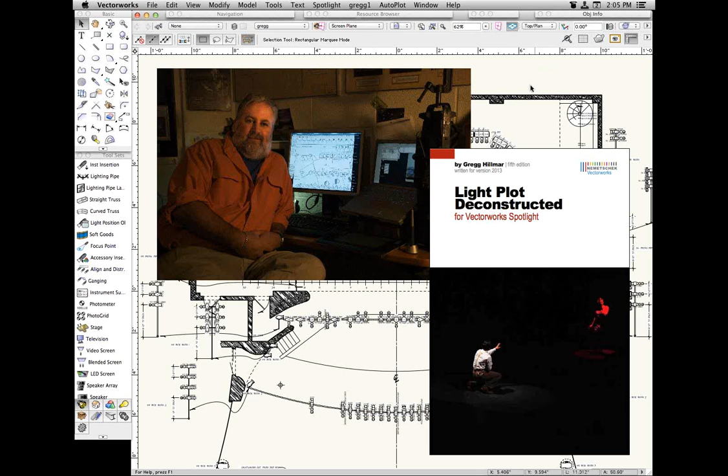Vectorworks 2014 just came out, about 10 days ago or so. And of course, there will be a 6th edition of Light Plot Deconstructed upcoming here very soon. So having said all that, let's dive right in.

One of the things I want to stress is that what we're headed towards is in fact the light plot. The plot is the final output that we're looking to do here. A light plot, of course, is a method of communication between the designer and primarily the master electrician, but also any others on the production team. So it is a very specific kind of drafting to make that happen.

As such, it is primarily a two-dimensional drawing. And while Vectorworks certainly deals with three-dimensional space, and we'll talk a little bit about how that works in using some of the tools, it is important to recognize that at the end of the day, it will in fact be the two-dimensional drawing as seen here.

The other thing I'm going to mention today, to start with, is we're not going to spend a lot of time today talking about basic Vectorworks stuff. I will point out workspaces and so forth, including menus. You might notice I've got my own menu and different menus, and have rearranged some of the menus across the top here. Your workspace, including menus, toolbars, and tool palettes, is completely customizable and can be arranged any way that you want.

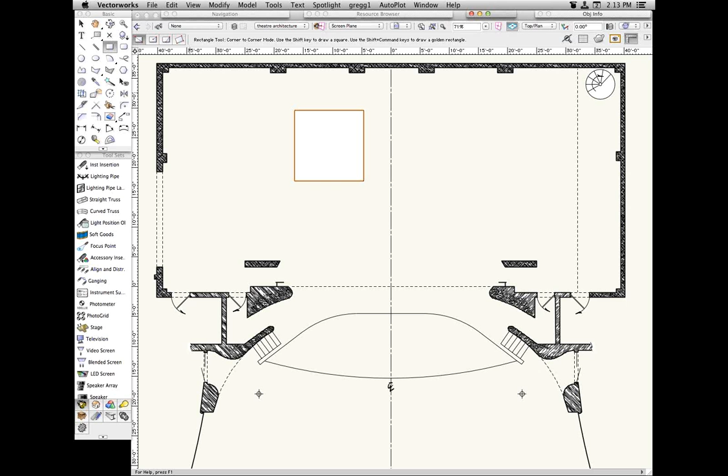Classes work across all layers. So if you make a particular class invisible, every object that's in that class will be invisible across all layers. So those give us very nice control of a lot of the graphic attributes.

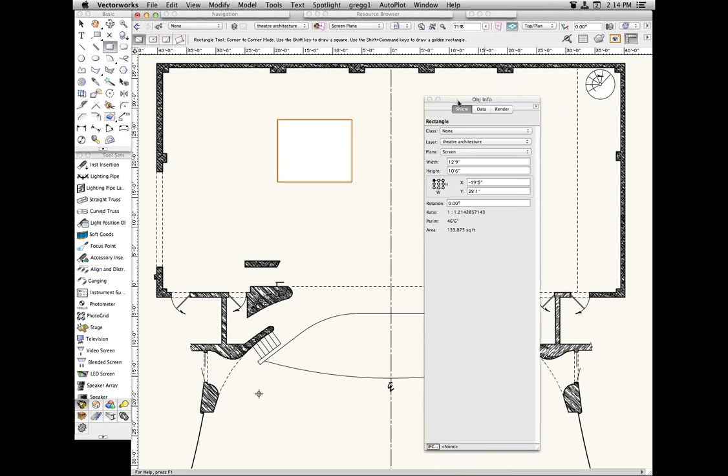And it's worth mentioning one of the neat new features in Vectorworks 2014 is that now from the object information palette we can create new classes and/or new layers straight from the palette, which will make working with classes and layers a whole lot easier and better.

All right, so let's get rid of this rectangle and look at our theater here again. This is a two-dimensional representation. This actually came in as a DWG, as I recall. It was sent to me by the production manager and was basically copied and pasted into a Vectorworks document. Vectorworks can easily import DWG and DXF files without any issue at all.

There are a bunch of parameters that do need to be set and dealt with, since there are differing ways that folks using DWGs work. But the import feature is very robust and has been improved also in 2014.

New in 2014, rather than importing information like the floor plan of the theater, there is now an option to reference a DWG or DXF file, which, like referencing a Vectorworks document, will bring the graphic information into the document that we're working on, but not bring in all of the classes and that sort of thing that you may or may not want in your document.

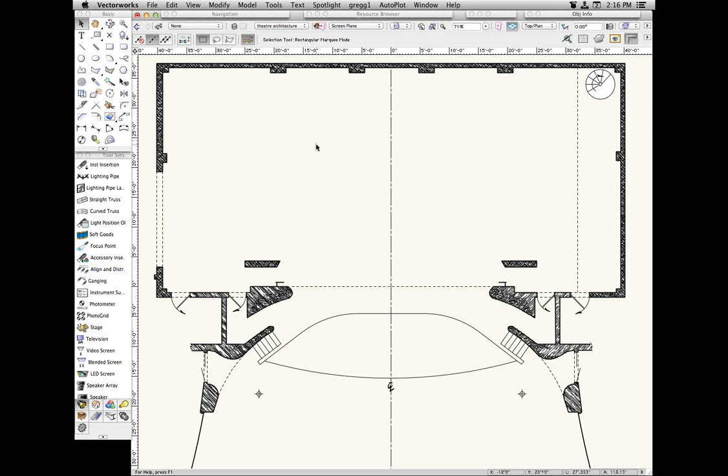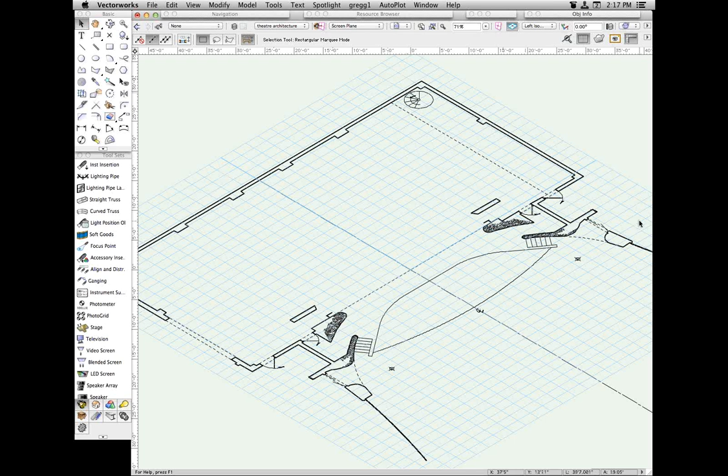So, for example, if we go to a three-dimensional view of this space, we're now looking at this in the left isometric. All of these are layer plane objects, so they look as if they're laying down on the floor, which, if I put my grid back in here, you can see. Having these be layer plane objects as opposed to stuck to the screen allows us to see the space in 3 dimensions and to start to interact with the space also in 3 dimensions.

And if we need to and want to, we can actually very easily change these from a 2-dimensional object into 3-dimensional situations. So if I grab the push-pull tool, for example, click on this and pull this up, I'm going to tab into my HUD, tell it that this is 18 feet tall, and we've just created that 3-dimensional object there. I can grab this, say make that the same height as this, grab this over here, there we go, and make that the same height. So we can very quickly turn this from a 2-dimensional drawing into a 3-dimensional drawing very easily.

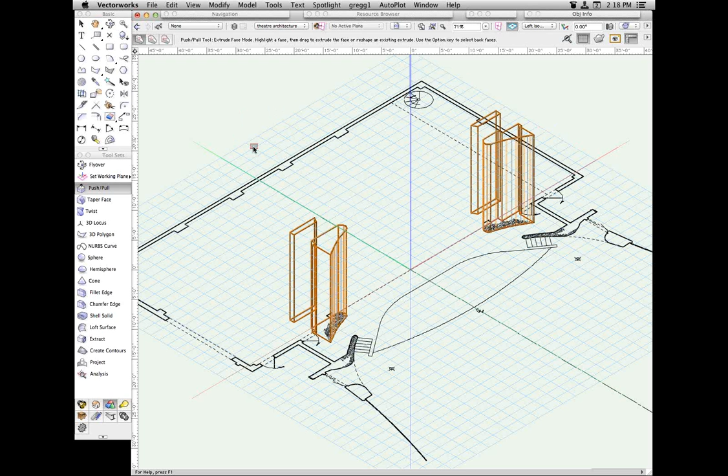Which will become very useful to us later on. And I'm just going to undo all those operations so we go back to where we were. Let's do this again. One of the problems that happens is this is now a 3-dimensional object. If we go back to our 2-dimensional view, you can see that the visual of that has changed and is not something that I would necessarily want in my 2-dimensional version of the plot.

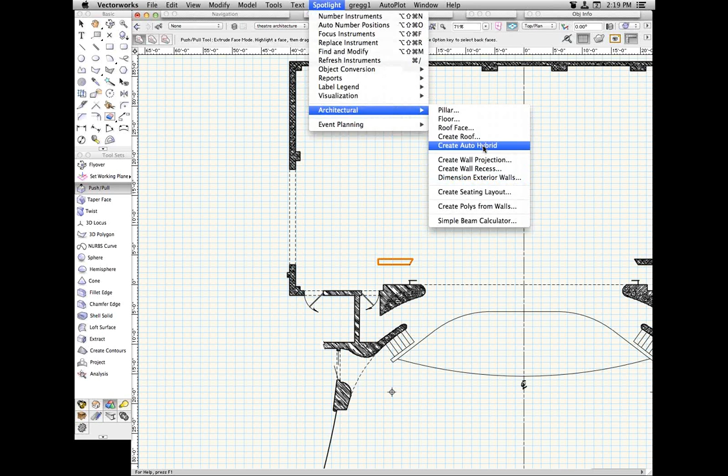One of the nice things that came in Vectorworks 2013 is the ability to change this into an auto hybrid object. If I go to the Spotlight menu, it's under Architectural, and create Auto Hybrid. This is still a 3-dimensional object, but if we go back to our 2-dimensional view here, it's now being displayed using the 2-dimensional graphic attributes and so forth, all of which can be controlled via the Object Info palette and changed to be as we like it.

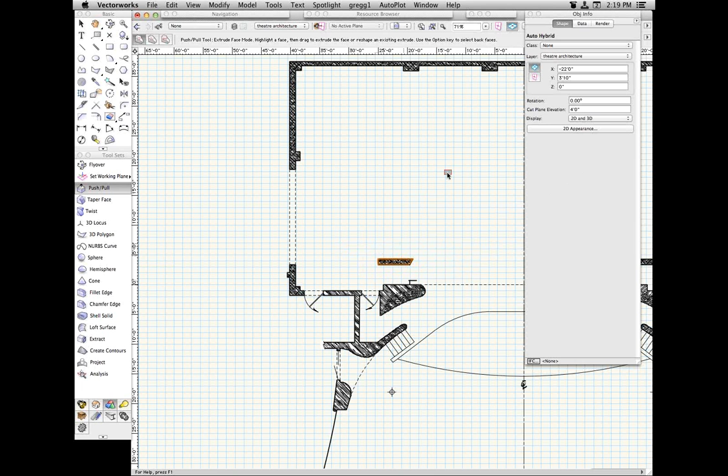So that too is a really nice change that I can see making a huge difference going forward in the way that information like this is dealt with and played with. So let's turn that back into our 2-dimensional object and go back to here. So now I've got the theater all set.

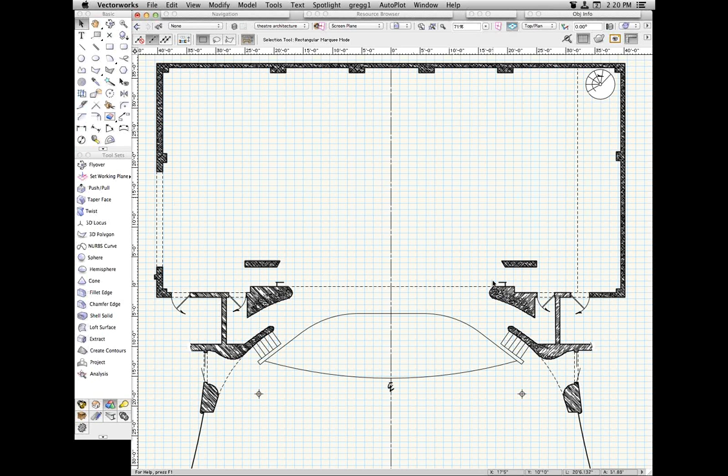The next thing I'm going to want to do is to import the scenery. And again, we have several ways that we can import information. We can import a PDF, depending on if that's the way that our scenic designer is sending us plans. With a PDF, snap cues and that sort of information still works. You can see my cursor here snapping and giving me information about things on there. That does work when you import a PDF.

With a PDF also, if it was created in the right way, we can explode a PDF and get down to the core geometry and use that, which will then allow us to create three-dimensional space out of that as well. We can import images. There was a scenic designer I worked with for quite some time that still drafts everything by hand. So when he sent stuff, I'd scan it or take a picture of it, turn it into a JPEG, and import that to use in the drawings as well.

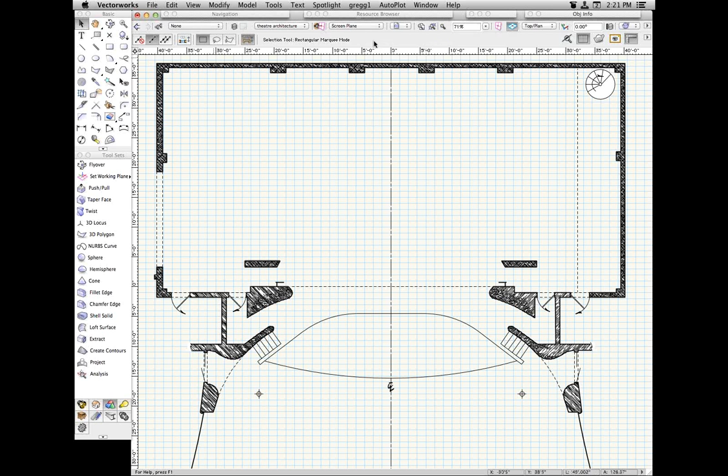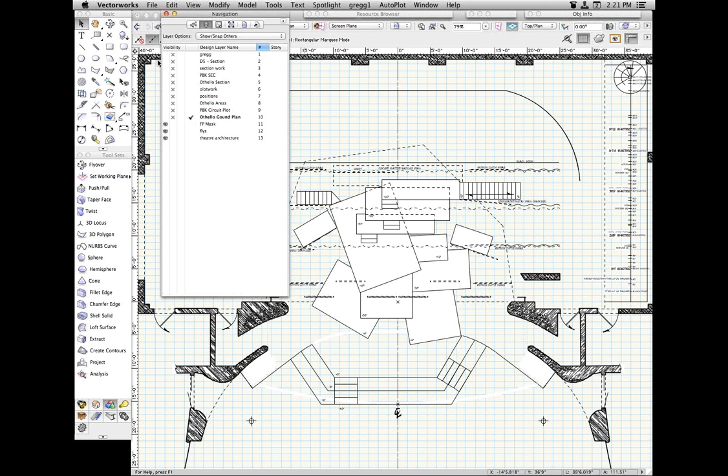So there are several ways that that can all come. Luckily, the designer I was working with on this particular project also used Vectorworks, so it was very easy for me to import his work. And what you just saw me do, I just used a saved view here to change to a different layer and class scheme. So right now, for example, the theater architecture sheet is on the drawing table. The flies sheet is on the drawing table. The floor plan mask sheet of vellum is there. And the Othello ground plan sheet is now back on the drawing board.

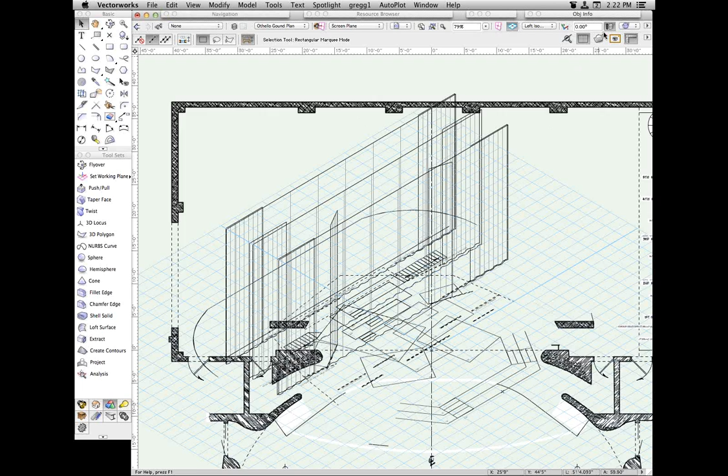Okay. And again, these are all two-dimensional operations, so we can see the two-dimensional nature of things here. Oh my goodness, why is my theater still in one direction and all of my scenery in the other? That is because unified view is turned off. If we turn unified view on, then layers will stay in the same relationship to each other as we're moving back and forth between the two-dimensional and three-dimensional situations. So lots of ways that we can import the scenery and get information about the theater and the scenery into our space. Okay. So now with the scenery here and the theater there, we're ready to start thinking about the lighting.

I generally start thinking about focus areas. So if this is all the playing space, then how am I going to light this space in terms of the action of the play and the scenery, using the physical characteristics of the lighting instruments and so forth. We can only light a certain chunk of space with each lighting instrument, and we usually define that as a focus area, where an instrument is actually focused to.

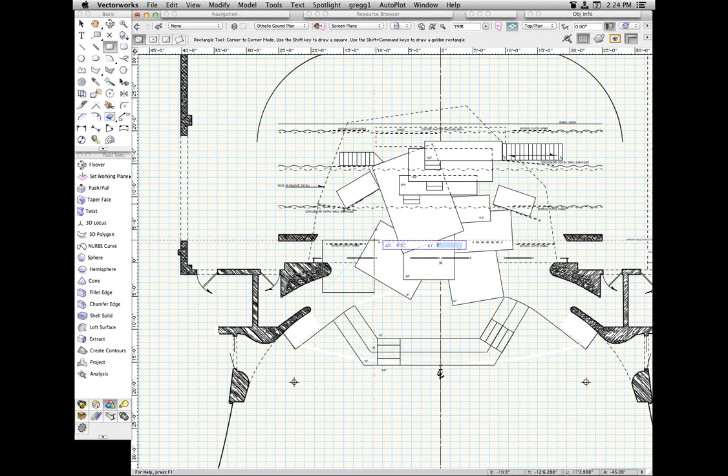So I'd be looking at, for example, the width of the proscenium and the width of the playing space here, trying to decide what size chunks of space I like. Generally speaking, I make them anywhere from 6 feet to 8 feet. So I might plan out, well, let's see, if I can draw an 8 foot by 8 foot space in here. Again, I'm just tabbing into my heads-up display there and specifying a particular size. I just made that an 8 foot by 8 foot rectangle. I could change that if I wanted to here in the object information palette.

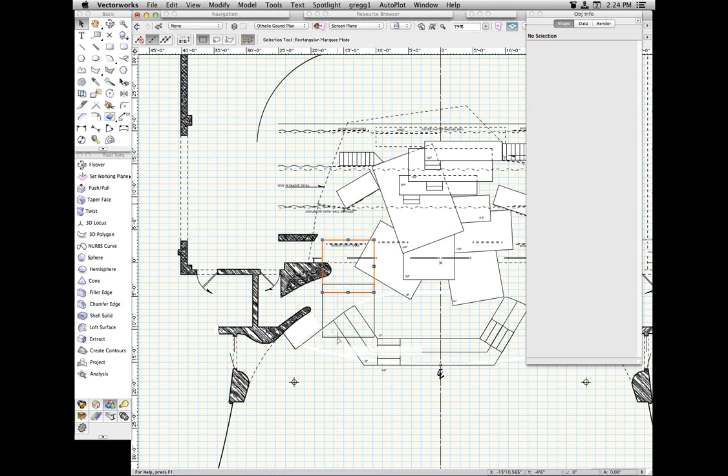In this case, I'm going to change its class to be a draft tech, and you can see what that does is change the graphic attributes of that particular rectangle, so it's a thin red line and no fill. So I might decide that 8 foot by 8 foot works well for this space and for what the director is doing, what the actors are doing, and fills the space nicely. I particularly like an odd number of focus areas, so that there's always an area at center stage, and they go to either side. And in this case, 8 fits very nicely within the architecture.

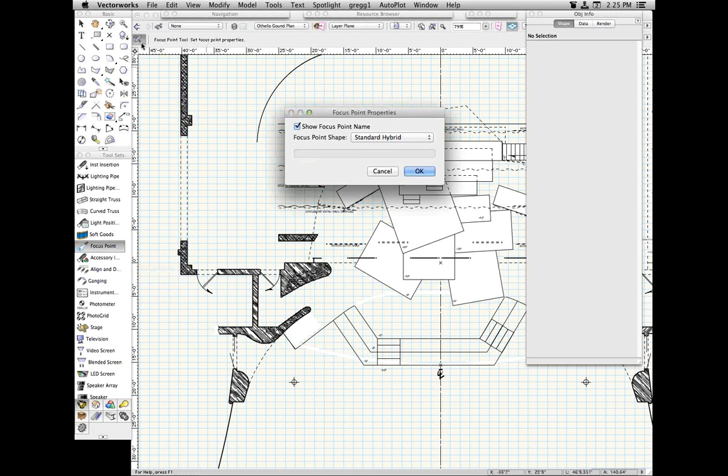So once I've decided that, I'm going to get rid of that rectangle, go to my Spotlight tool set, and choose the focus point tool. Then come up and use the focus point properties. And here I have a choice. I want to show the focus point name, and then I get to choose a focus point shape. You notice there are several choices here about sizes and shapes, including a custom one that I have done myself. So I have created a graphic. It's a three-dimensional graphic to represent a particular focus point that in this case is an 8-foot by 8-foot by 7-foot tall cube, if you will.

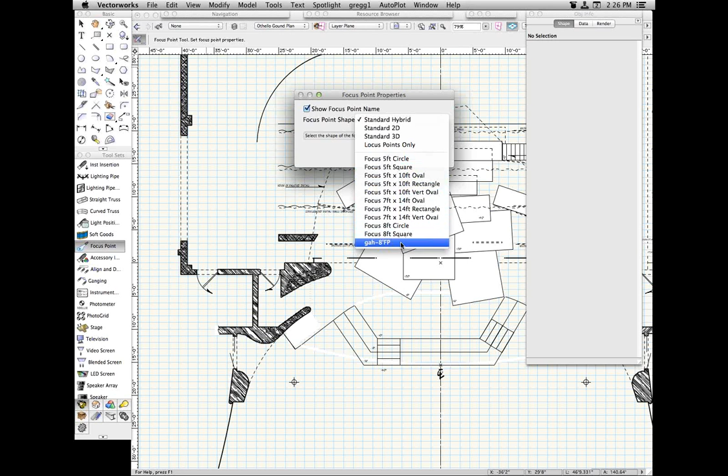Another space I work in quite often has a fixed height grid, and because of the fixed height, my areas are usually 6'6", maybe cheat out to 7 feet in some cases. So in that space, I've got another custom one that's a 7-foot by 7-foot by 7-foot square. So you can customize the graphics that you use for your focus points. I'm going to choose mine here, tell that OK, and then place one down here in this corner for right now. It's going to ask me for the name. I'm going to call this area AA, and I'm using double A's because, well, you'll see why shortly.

It's asking me for a focus height, and this is rather important. Vectorworks works in three-dimensional space, even though what we're looking at now and what we will end up with at the end of the day will be a two-dimensional representation. It still is working in three-dimensional space. So this is the first time we're starting to set that up in terms of lighting instruments, and it's saying, okay, where do you want to focus this particular light? And 5 foot might be a perfectly fine focus height, roughly shoulder height, for a normal actor standing on the stage floor.

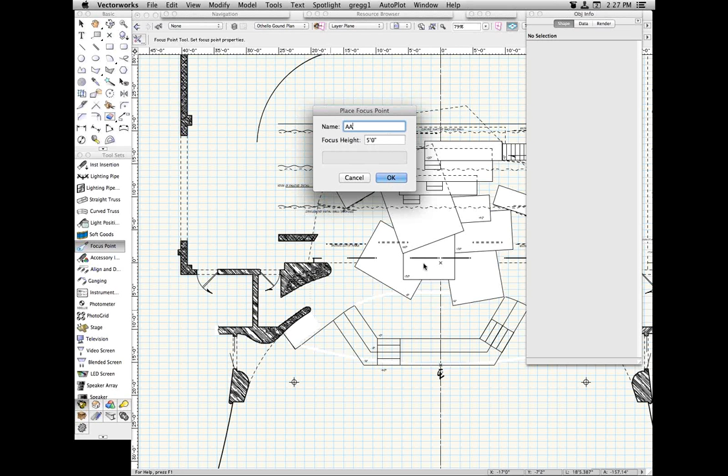So in this case, if I'm lighting the area on the stage floor here, I might leave that at 5 feet. However, if an actor came up on one of these platforms that's a little higher, lighting at 5 foot would probably be a little low for an actor there. So in that case, I would change the focus height to be a little higher. But for this one, I'm going to leave that, tell that OK. And it has now placed the focus area down here in the corner where I clicked. Okay, and it is. Let's zoom in on this a little bit here.

We can actually now see that this has got the focus area here. It's named AA, and actually all of this is changeable. We can change the font, change the size of the font, etc., so that we can customize this graphic to look like anything that we want it to look like. We do not have to accept the program defaults for that space, and it will continue to work exactly the same. So it is now set there, ready to go.

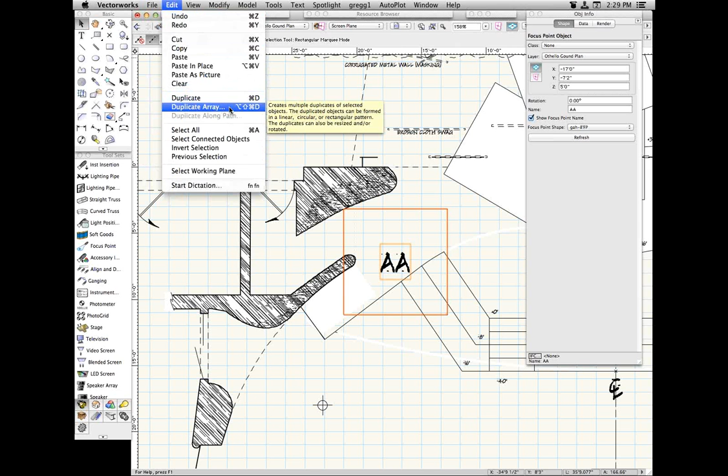I then would move on to the next focus space. If I was doing something like a dance concert where everything was on the floor, I could use the duplicate array tool here to populate the entire space quickly with focus areas. Or in a situation like this one, I would probably do them more or less one at a time, depending on the height of the platforms and those sort of things.

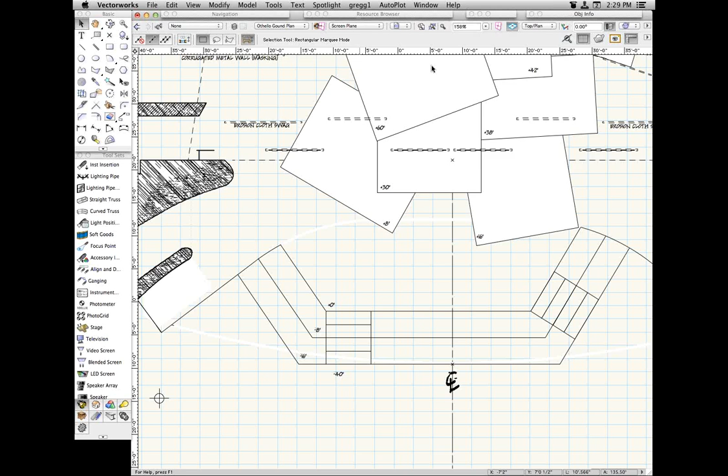However, I'm going to delete that because through the magic again of a saved view, we're going to just stick the sheet of vellum that I had already done all of the focus areas on right back into the document here, and you can see the placement of focus areas for the particular space that we're going to use to light this. So now we've got the focus areas.

The next thing I'm going to think about is lighting each of those. In order to do that, we're going to need to be able to hang lights somewhere. So the next thing I want to do is create positions to hang those lights. Vectorworks 2014 has introduced 2 new tools, a lighting pipe tool and a lighting pipe ladder tool, that make what used to be a rather convoluted process to create positions very easy.

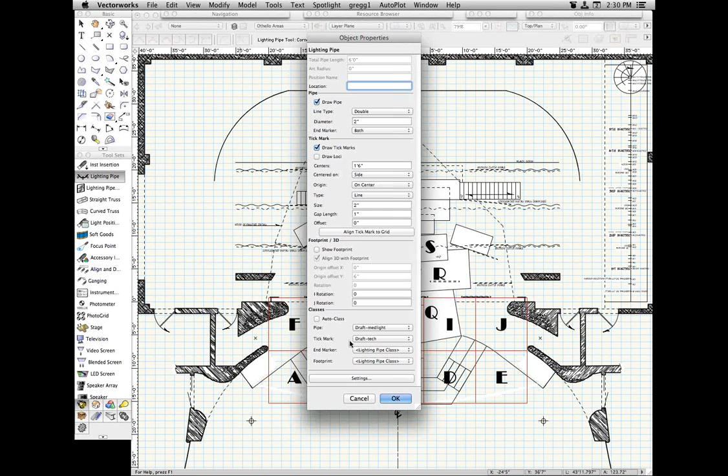So if I select the lighting pipe tool, for example, I can come up and set some properties. These have already been populated with things that I've chosen before, including my class designations. So my pipes are going to be drawn with a medium lightweight line. Tick marks, which we'll look at in just a second, are drawn with draft-tech, which is the light red line. Lots of options here. I'm just going to tell that OK.

One of the real benefits of the lighting pipe tool is that we can now draw a position easily, including doing curves. In previous versions of Vectorworks, doing a curved position was very convoluted. It could be done, but it was just not an easy sort of thing. With this new tool, you can use any of the normal drawing methods to draw what a position really looks like.

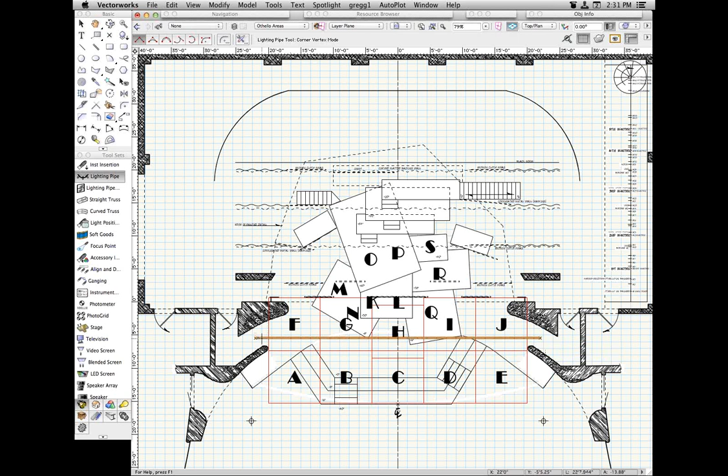The one I'm going to draw, I'm just going to use the straight tool here, and I'm going to draw this line. You might notice I'm cheating. I'm snapping to a couple of points that I had previously placed in the drawing. Double-click there to create that. If we look at our object info palette now, we can see that this is a lighting pipe. Class and layer are listed there. X, Y, and Z are listed there, and all the stuff that we had chosen before is also listed.

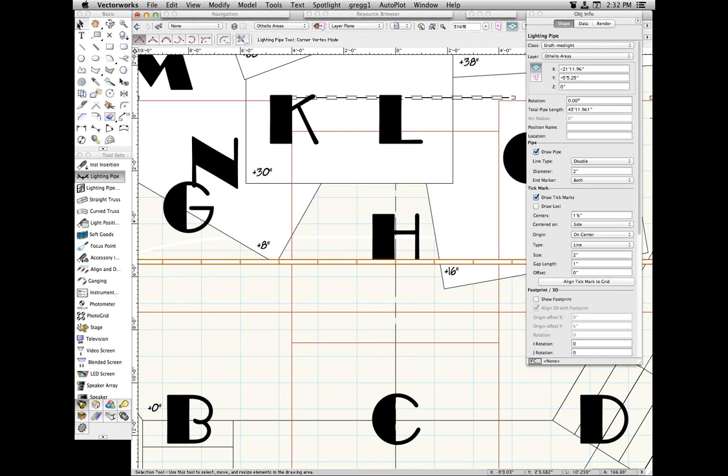It's being drawn with the medium weight line, and if we zoom into this, you can see that the way I've done this, there's a tick mark every 18 inches. You can see it lining up with the grid. If I turn the grid off, you might see that better. So on the pipe, there is now a tick mark at a user-definable space. I leave mine set at 18 inches, which is sort of the industry standard distance apart for most lighting equipment.

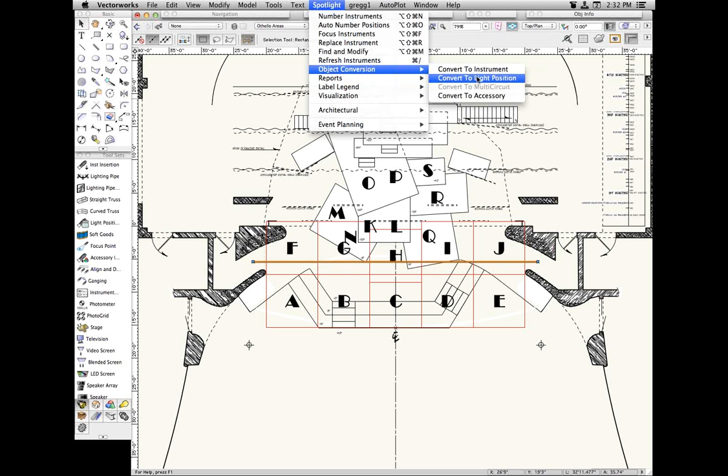So this is now a lighting pipe. It is not quite a position yet. We still need to turn it into a position. Object conversion, convert to light position, and it now is first front of house position. Tell that OK. It helps if it's selected, thank you very much.

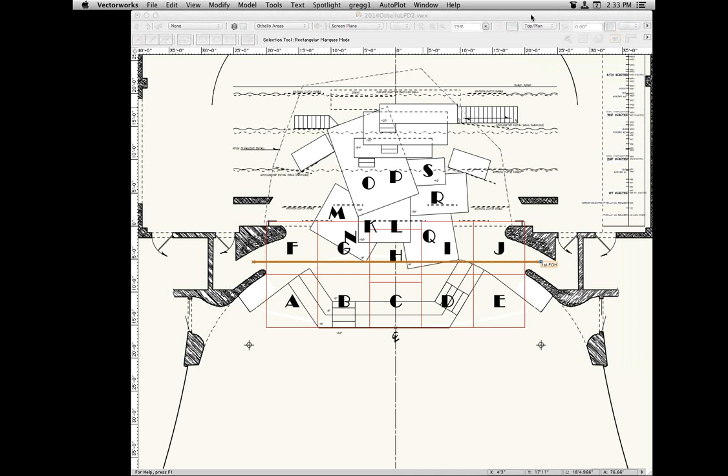Again, it is now a light position object. X and Y position is there. Its Z height is 0, which means it's sitting on the floor. Not really a good situation for a lighting position. So to find that Z height, what I might do is pop into my section drawing. Again, I'm using a saved view here to pop into my section drawing.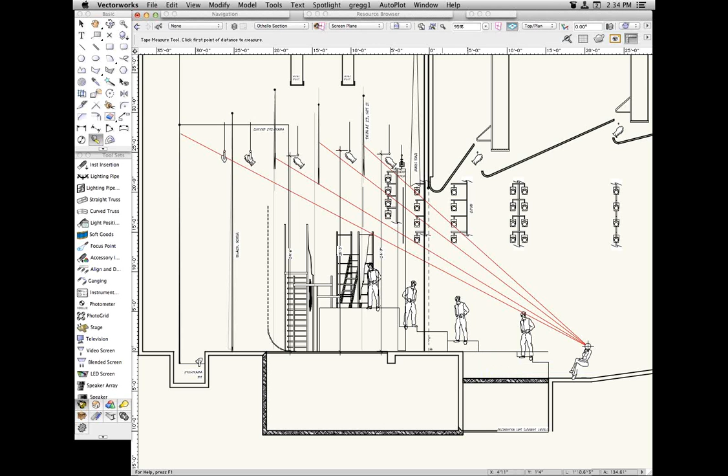First front of house position is here. I might grab my tape measure and click right there, come down to floor level, and I can see that that's basically 25 feet in the air. Escape out of that, go back to my previous view, and in my object information palette, I'm going to tell that to be 25 feet in the air. Okay, position name is listed.

One of the great things in Vectorworks 2014 is that position summaries and instrument summaries have been completely rewritten. In previous versions, the position summary was basically a useless piece of information. You could do some things there, but had no control over what it looked like or how pieces were ordered. Now in this version, you can have a whole lot of control over what it looks like.

You can also create this, and it's all handled through the instrument tool over here, which we will demonstrate in a little while. It's a remarkable improvement over what used to be here.

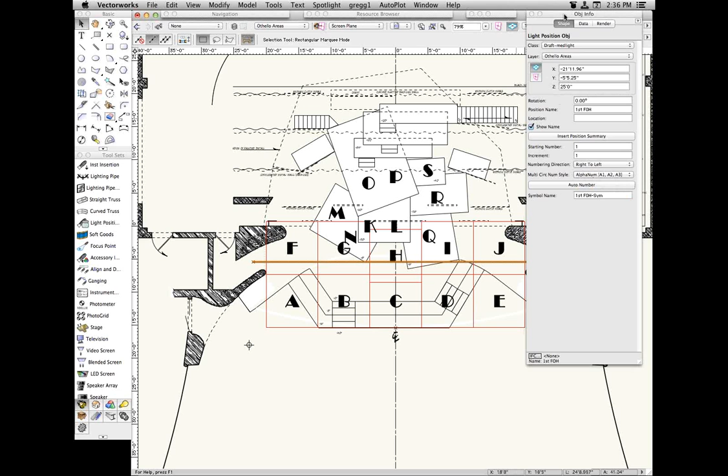We can still decide how we want light position objects numbered, whether instruments start at number 1 and increment from there, whether numbering goes right to left, left to right, top to bottom, or bottom to top - industry standard in this case. We're going to number right to left on this particular thing. We can also decide how multi-circuit instruments are numbered, whether cyc lights, for example, are numbered as A1, A2, A3 for 3 cells, or 1.1, 1.2, 1.3, or 1A, 1B, 1C. We can choose this on a per-position basis. So some nice new things with the light position object.

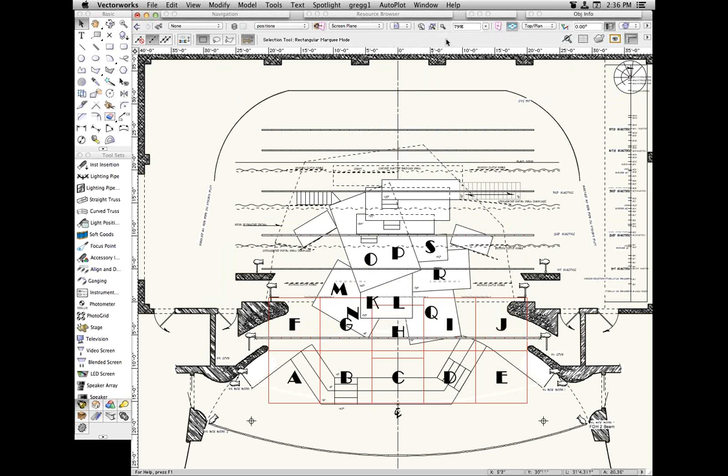We'll come back and look at that more as we go through. I'm going to delete this because, once again, through the magic of a saved view, we'll slide the position sheet of vellum back in there, where I've already created all of it, including, you might notice, some curved lighting positions out here in the front of house position.

So now we've got our areas that we're going to light. We've got our lighting positions, whether they're based on architecture or added on a per-show basis - whatever we can add in - and we're now ready to start thinking about adding some lights.

If we were, for example, lighting area C right here, dead center, I would start by figuring out where the light's going to come from for this particular angle. I would work this out ahead of time. For right now, I'm just going to grab the line tool and pull a line, and with a nod to Stanley McCandless, we'll say the front light coming in from this side is going to come in at a 45-degree angle.

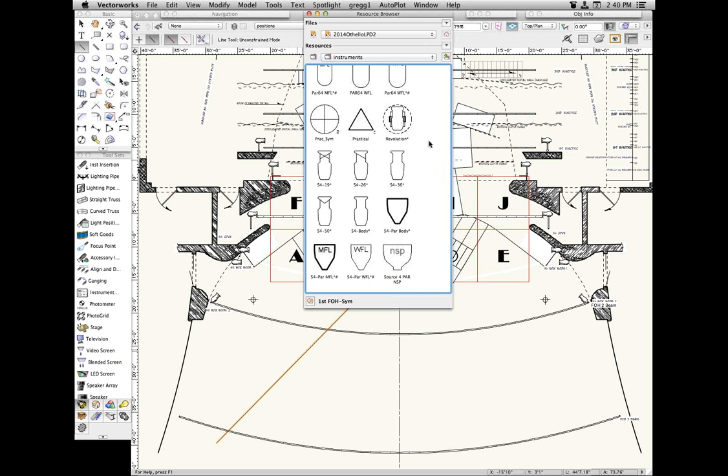One thing we should say about these symbols is that they're not just the two-dimensional representation - the symbols include lots of information built in. So it's not only the graphic representation, but also things like the beam angle and field angle of each instrument, candle power, the lamp that's in the instrument, the weight, color frame size, and all sorts of information provided by the manufacturer that's actually part of each of these symbols. Very nice to have.

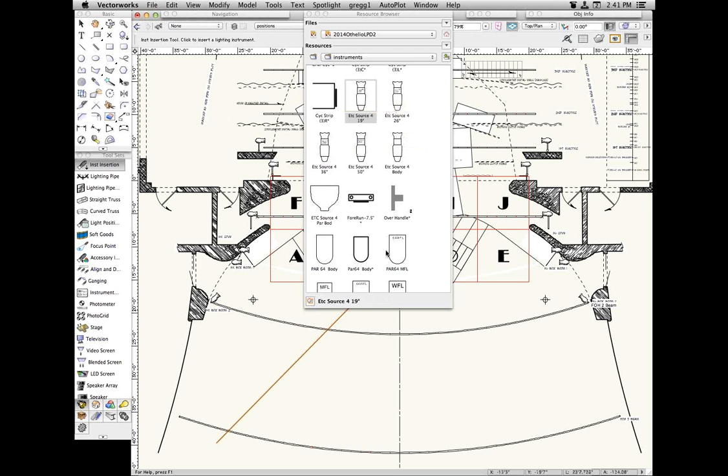Looking at this, I'm going to double click to make the ETC Source 4 19 degree my active symbol. I can see it's the active symbol because it's listed at the bottom of the resource browser. You may have noticed that when I did that, it automatically selected the instrument insertion tool from the toolset over here.

Let's zoom in right here on this second front of house position. I'm seeing my little tick marks, which give me my 18-inch spacing. So if I click right on that second front of house position, I'm going to start to place a lighting instrument, and you notice it has just started to place it.

I can rotate this instrument around and determine where it's going to point. There are two schools of thought here. The first says that when you're drawing a light plot, the instrument wants to point at the area you are focusing it in, so in that case I might want to point my instrument at area C. The second school of thought says that all instruments should be drawn at the 90-degree marks, the cardinal positions, either straight up and down or completely to the side. I was always taught to draw at 90 degrees, so I'm going to make that choice.

The second click then places the instrument into the drawing. If we look at our object information palette, we can see this is a lighting device. Its class and layer is listed there. Notice the X and Y position, notice the Z height, and notice that it's picked up the fact that it's on the second front of house.

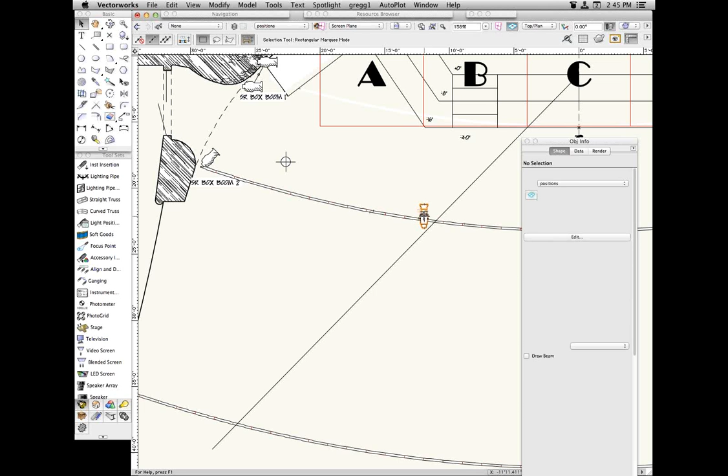Now, if we come back to our lighting instrument and double click on it, we're going to get a dialog box that has a lot of the same information. It tells us the position, the channel, the dimmer we've added in, circuit number. The nice thing about this is that for the focus, it has a drop down that will allow us to select the current focus points we've already added into the document.

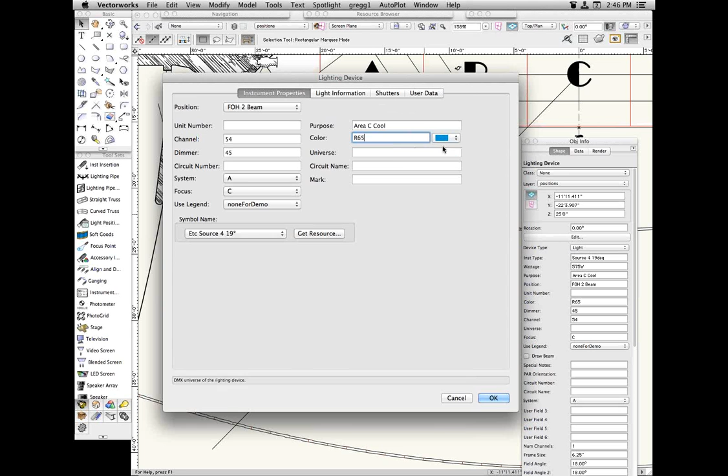And you might notice that as we add R65, it picks a suitable close color, takes the RGB value and translates it into what it can do on a computer so that the swatch actually matches the 65. Now there's a lot of other information in this dialog box that follows the same information that's here. We can also, as we get further into this, set shutter cuts that will be visible on the document.

For right now, let's pull that back out. We can also specify particular user data, adding or changing specific fields to enter in any data we particularly want to add. So all of that is just another way, and sometimes a better way, to get to the same information as the object info palette.

The point is, with the focus here especially, we want to make sure that this light is related to this focus unit or focus area, so that they know that will allow them to now share some data there as well. So what that does allow also is for us to be able to see some additional information.

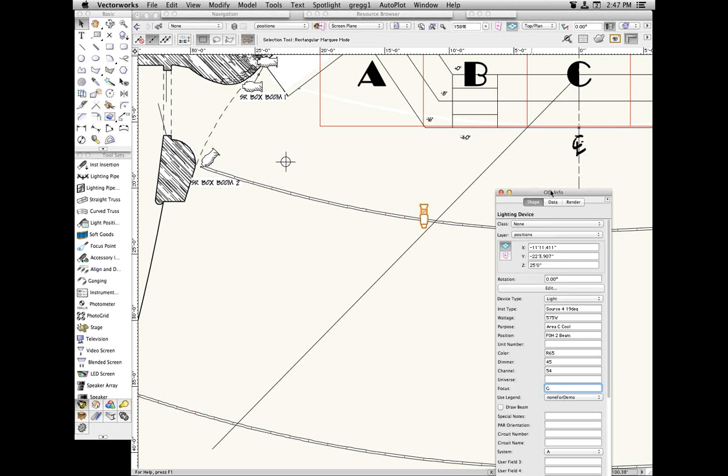I'm going to move this over here for the moment so we can slide this down a bit, and I think we're done with this line for the moment, so let's make that go away. So with this light focused at area C, and we've told it so, I can say, okay, let's see what that looks like.

What it has done is said, okay, so I'm a Source Four 19 degree with these field angles and these beam angles, which is the information that comes with the instrument, and I'm 25 feet in the air at a 45-degree angle. So what's the optics that will happen on the stage? This then gives us a representation of the beam in the field from that light at this particular place, which is a very nice graphical representation of what we're actually seeing.

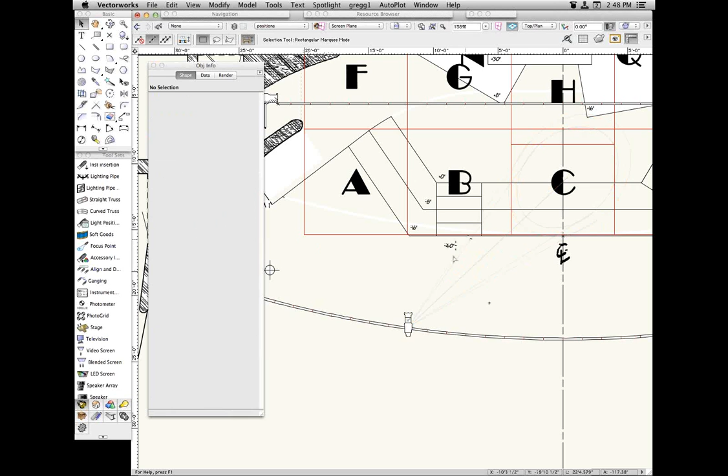Now, I unselected it so you could see that one of the things it does here too is it projects the color of the gel we've added into the instrument. So if we change the color here, then it updates the color here as well.

And in fact, if we wanted to, we could have that drawn - let's go back to R65 because that's much more interesting - as a 3D solid, which shows us a little bit more graphically what we're actually covering.

Right now we're looking at the beam at the focus point. We could say, okay, what does that look like also at the fall-off point, i.e., in this case, that's set to be 5 feet further down the line from our focus point - where is that hitting on the floor, basically. So a lot of information we can see there, because these three objects are talking to each other and sharing information.

One of the things I see, for example, if I'm lighting area C, this particular light is not covering that entire area. So I might want to make a decision about that. That's not quite the right light for this particular case.

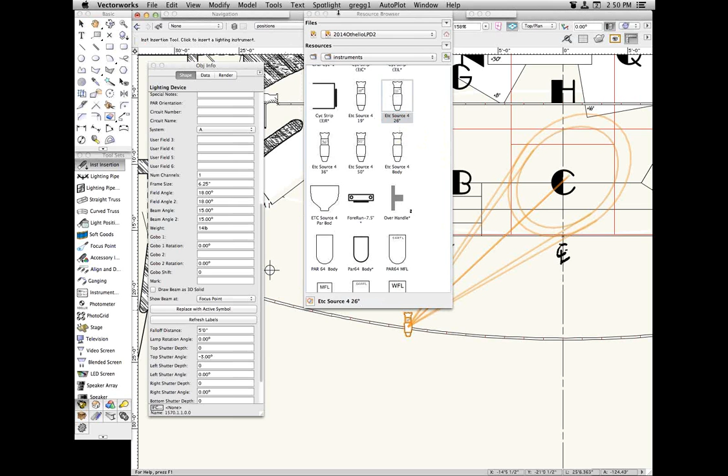So I might go back to my resource browser and grab, say, the 26 degree, double click to make it the active symbol, and choose to replace with active symbol from the object information palette - it changes this to a 26 degree. All of the information about the 26 degree is shared. You can see the beam angle and the field angle have changed, but none of the information that I added in has changed.

So it has brought all of that information with it, made that change, and I can then say, well, is this then a better choice for that throw than the 19? So the idea that we're actually seeing this information really does help us in terms of making decisions about the light as well.

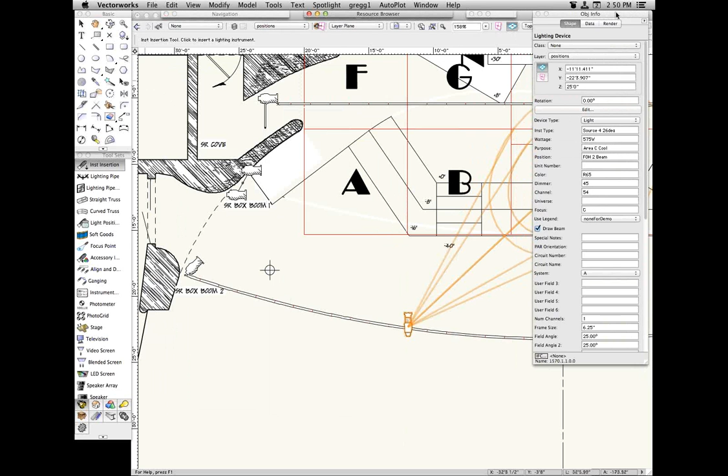One of the new things in Vectorworks 2014 is that we can now not only see the beam in the horizontal state here, but also we can choose to see it vertically as well.

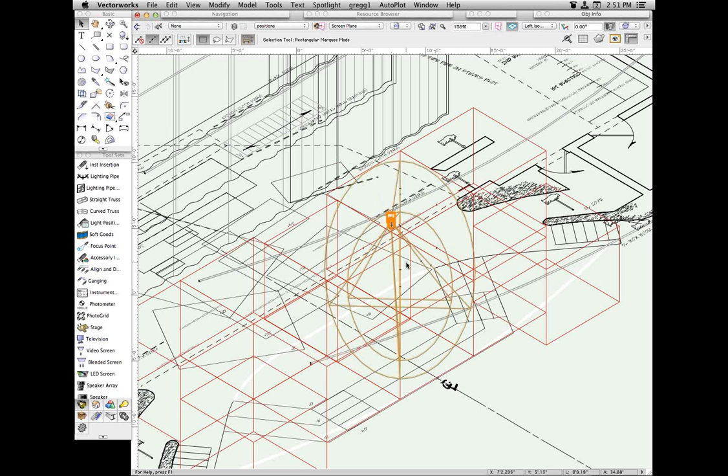So if I use a vertical beam, now of course we're looking at this in two-dimensional plan view, so we just see that as a line, but actually if we go to a left isometric, you can now see through this that we're seeing this beam and field actually as a vertical representation as well, again giving us a lot of information about this light at that distance, focused at that particular focus point. So lots of good information then is happening as these things are sharing information back and forth between them.

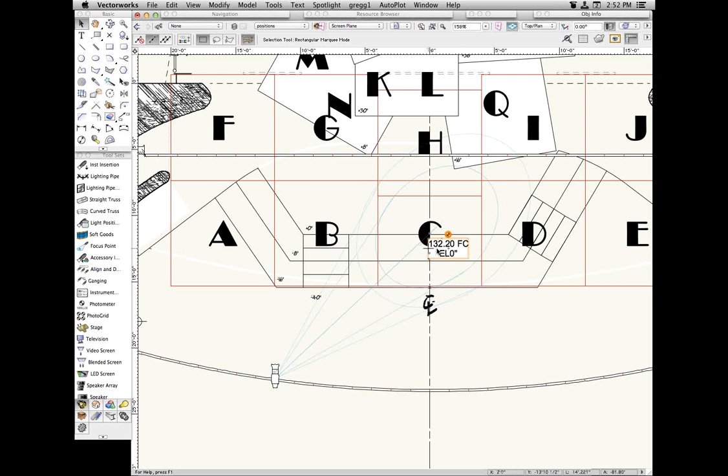So the other thing that actually this would allow us to do is we can grab the photometer tool and pop a photometer into the space. And right now this is telling me that, for example, at elevation 0, i.e. on the floor, this light at that distance is giving me 132 foot candles of light. This is on the floor, as I said.

We put our focus point at 5 foot, so if we move this up to 5 feet, you notice that updates and is now much brighter because it is sitting right at that focus point, and gives us information then about that. Now, in a theater, do I care whether there's 195 or close to 196 foot candles of light? Well, not really, but certainly anybody who's doing anything for the camera, this becomes very important information.

And in fact, I can use this, if I had another light that was put in here, and I move this over out of the beam into the field, to make sure that my next light over, actually in area D here, was covering this as well, so that we don't have any dark spots as we're moving across the stage. So again, these sort of smart objects talking to each other and being able to share information gives us a lot of useful information here. So very nice indeed. So let's get rid of that and come back to our light here.

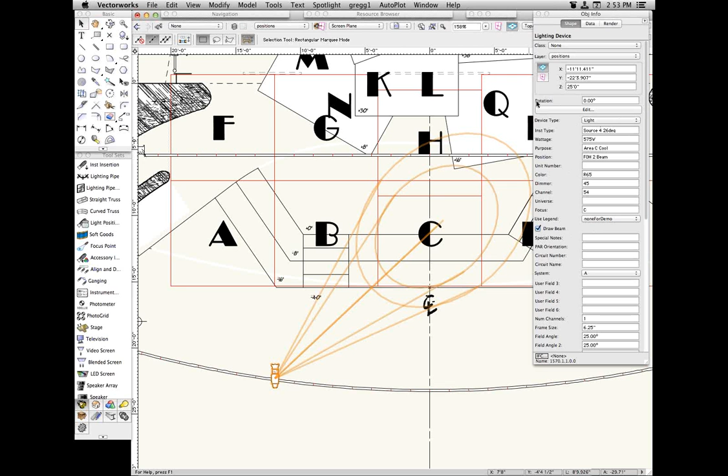We added actually a lot of information about this light into the database that is kept with each and every light. Might be kind of nice actually to see some of that information on and around the light itself. If the beam's not on, of course, we don't actually know where this light is focused, don't know anything about its color or dimmer or channel, all of which we're going to want to represent graphically. And we do that actually through applying a label legend to the particular light.

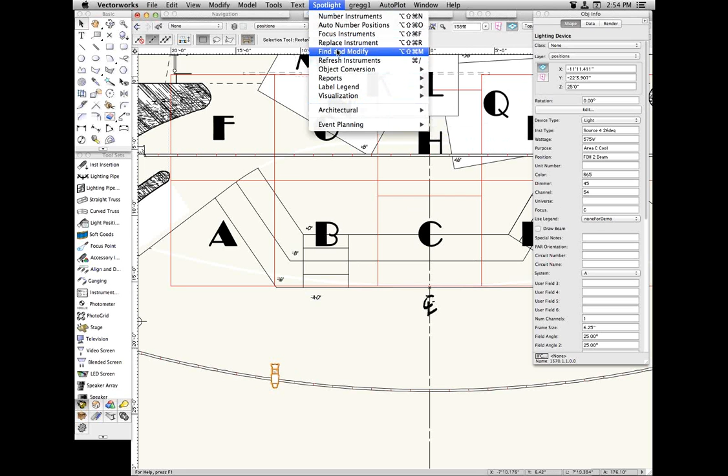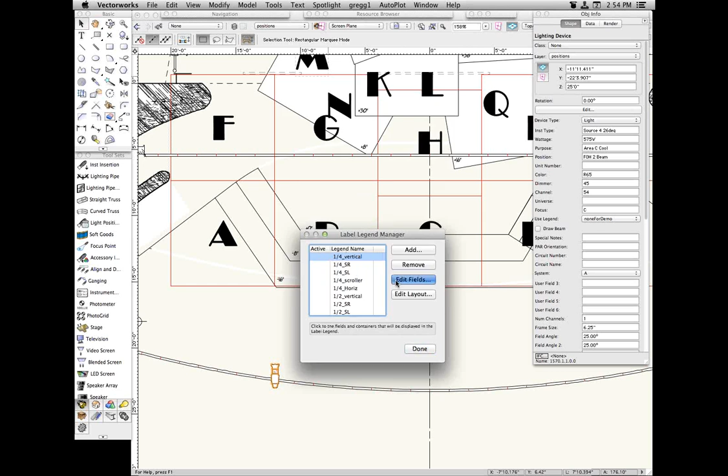So if I go up to my label legend manager, now you can see here that in this document I've already created many label legends for various purposes. My 1/4 inch vertical is a legend that I use when I'm in 1/4 inch scale, and the light itself is vertical, as this one would happen to be. I've got one for 1/4 inch stage left, 1/4 inch stage right. So if it's pointing stage left, if it's pointing stage right, if it's horizontal, or in this case, this is actually for a scroller. So for any of these, we can choose the particular fields of information that we want to actually see around the light.

So in this case, I'm showing the purpose, the unit number, the color, the dimmer, the channel, special notes and par orientation. This is not a par can, but if it was, then it could show the orientation, which I'd add in as a special field that you can see over here in the object info palette. I can also choose if these are right reading, i.e. it'll always be parallel to the bottom of the drawing or the right side of the drawing, which would be very nice for most things. For example, the unit number, the dimmer, and the channel, I would want those to always be right reading, to always line up parallel, as I said, to the bottom or to the right.

On the other hand, the color, in my practice, I put in front of the light. And if I had chosen to rotate the light so that it points towards the area, I would want the color to also rotate with that. So I'm going to leave the color not checked as right reading in that particular case. Okay. Likewise, the purpose is not right reading, so it would rotate with that as well.

We can also choose to add a container. For example, in my practice, I put a circle around my dimmer, I put a hexagon around my channel, and those two are built into the label legend itself. You can add whatever additional sort of container you want. One of the other ones I have is a hexagon that's rotated 1 point, which we'll show you a little bit later, so that one of the points of the hexagon is always pointed towards the instrument.

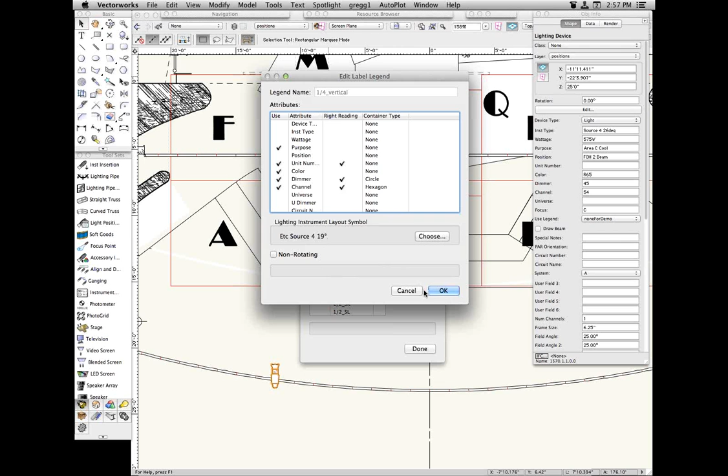So actually, the label legends for those have a different container. So you can choose that. We can choose now which symbol is being used in the instrument layout, which we'll go look at here in just a second, and we can choose to change that at any time through the course of using the label legend. So if we cancel this, we can then go edit where the layout of all of this information is

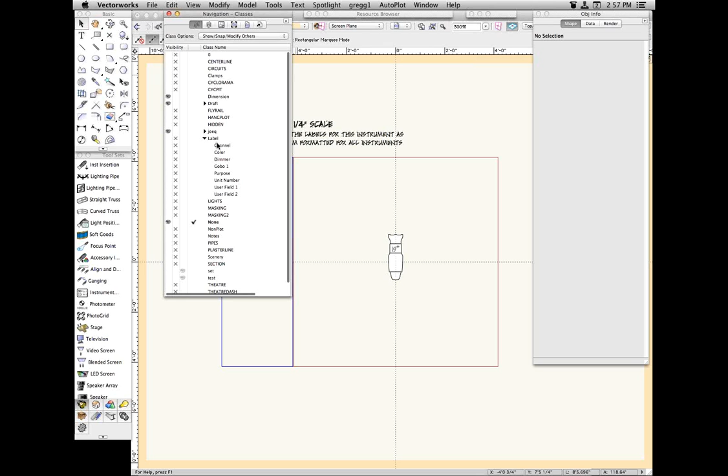around the instrument itself. And actually, we're not seeing any of these things because all of the labels and so forth are put into their own classes. So if we go to the navigation palette, we go to the classes, you can see here that all of these classes are turned off. So if I turn all those on, then you can see where all of these things are placed around this 19-degree instrument.

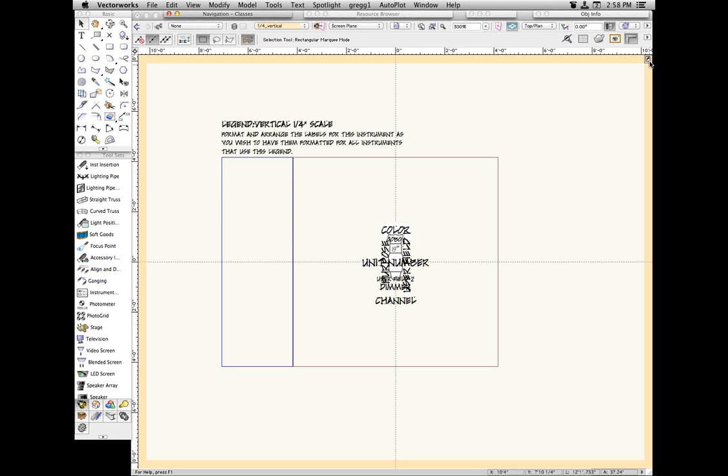So you can see the color here is in the front, the dimmer and the channel are in the back. There are other fields around this particular thing. This is the way that it will display in our document when we apply this to the particular instrument. So if we go back to our instrument, it's still selected there. Open the Object Information Palette.

Again, new in 2014. We used to have to type this in, and you used to have to type it in exactly, or it would never work. Now we have a drop-down menu. Hooray! So I'm going to choose my 1/4 inch vertical. And then if we zoom in on this, you can see that it has placed all of that information around the light as we specified it in the label legend.

Now, in prior versions, getting the placement of the dimmer and the channel and everything absolutely 100% accurate was painful at best, because what you had to do is set it in the label legend manager we just looked at, and then come back out to the document and pull it up and look at it, and oh no, that's not quite right, go back in, make changes in the label legend manager, come back out, apply it to the instrument, look at it, oh no, that's not quite right, etc. Was certainly not a fun sort of situation.

In Vectorworks 2014, a new feature is we can start with an existing label legend like this. We can move any of these labels, which you were always able to do. You can, one at a time, completely customize where any of these particular labels were on a per instrument basis, which was very useful if instruments were really close together. For example, you could move things away so that you could still read them.

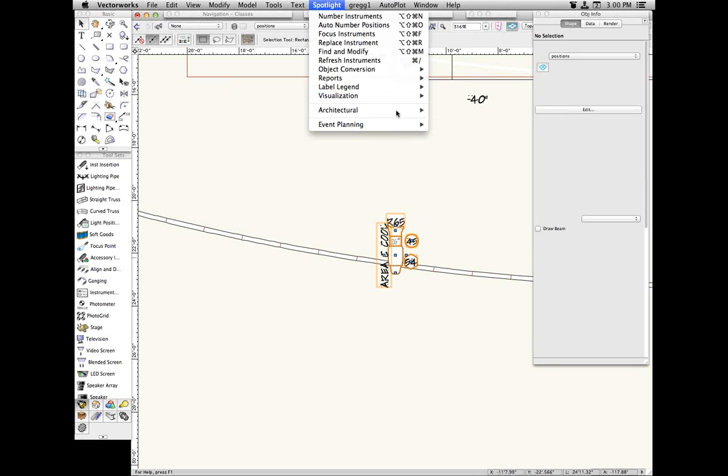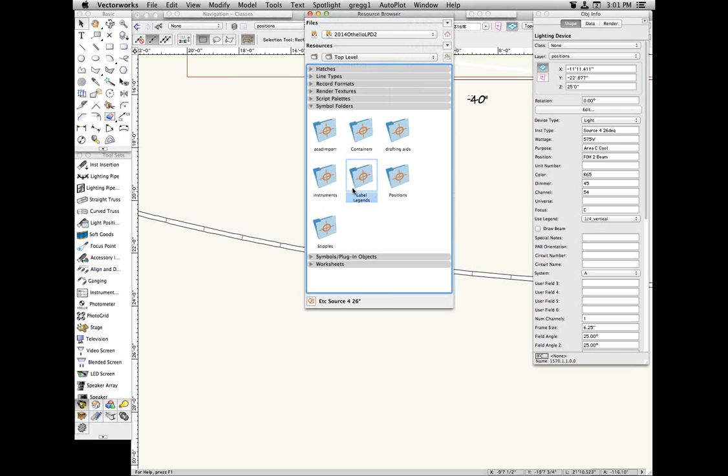Now, I will say one of the nice things about label legends is they are resources. So once you have them developed, you can, using the resource browser, import them and export them and move them around from one document to the rest. So once you have them set up, using them in other documents is very easy. As a matter of fact, if we pop in here, you can see I've got a folder of those here that I can import into other documents very easily.

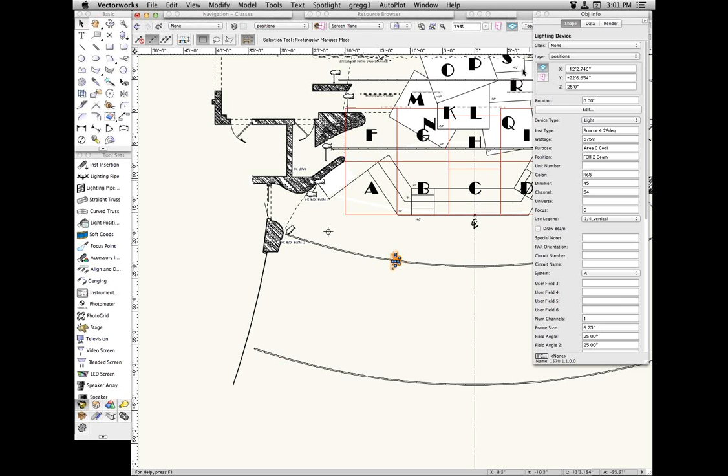So now we can see all of the information about this light. We can see what it's doing and where it is, and all of those sort of things. And we're then, of course, ready. We can zoom out and then choose where our next light that's lighting area C goes, and add that into the plot. And it's certainly not long before, bada bing, it's all done. Don't we wish it was that easy?

So what's our time? I haven't even been looking here. Oh, we're already at 3 o'clock, aren't we? Well, that means we're almost done, aren't we?

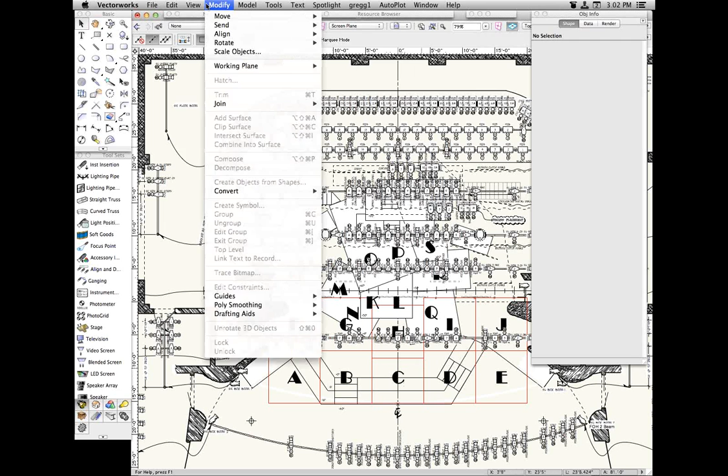So, well, let me just point out a couple of other things really quickly, and then we'll take some questions, I reckon. Another neat new development in 2014 is, if we go to layer options, show snap, modify others. So, for example, if I select area C now.

One of the new options is I can now select all of the lighting devices that are focused at that particular area, and now see all of them notated on the plot. That's a very nice improvement and makes life very easy in terms of figuring out where things are, and you can then actually deal with all 4 of those, in this case 4 lights that are noted as focused on area C in this plot, individually from there, so that's always a nice thing.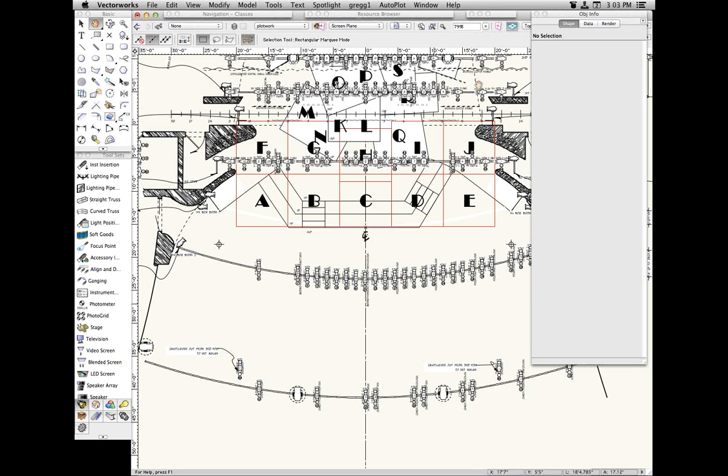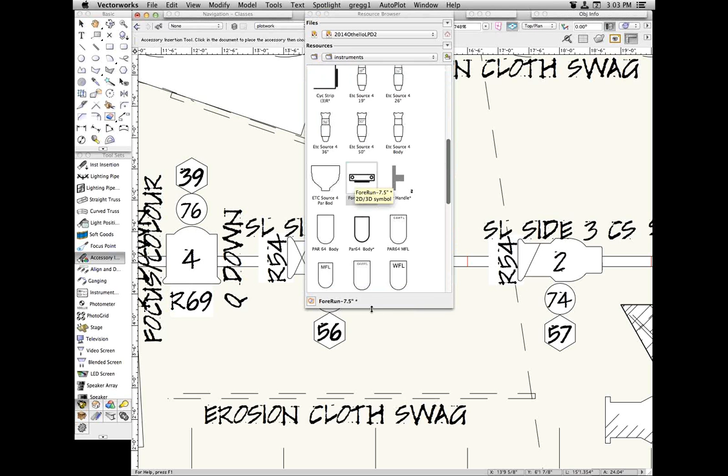Another new thing that I'll point out very quickly here, if we can zoom in here, and I'll just pick something here quickly. Using accessories. Well, let's just grab this one and use it quickly. This is a scroller, of course. My accessory insertion tool became active. I'm just going to actually lay that here.

This will rotate around just like our instruments will. Second click will place it. Third click on the instrument itself actually then relates the accessory to the lighting device. We can see this is listed here as an accessory, and it's connected with SL Side 3 CS instrument number 2. All of that was just like it was before. If we move instrument number 2, then the accessory knows that it's going with it. It has bonded, if you will, with that instrument.

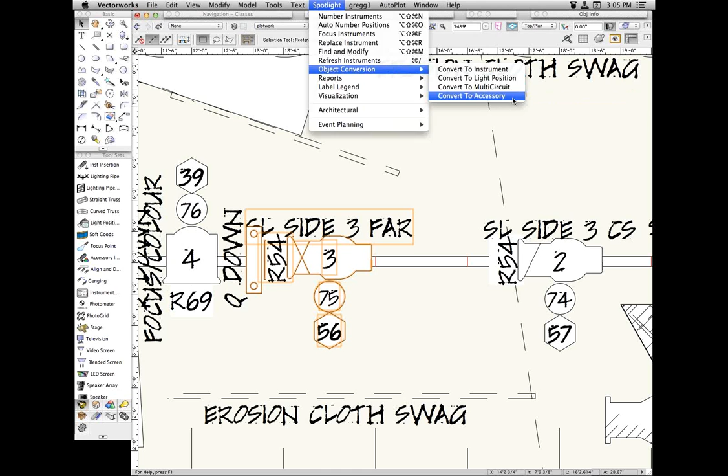So the other nice thing, however, now is that if I decided, for example, that I wanted this accessory not to be on number 2, but to actually be on instrument number 3, before I would actually have to delete that and add an additional one into 3. So now what we can do new in 2014 is, with that accessory selected, select the instrument and run the object conversion convert to accessory command, and it will now actually reassign that accessory to that particular light, so that it now actually thinks it's part of that as opposed to connected with number 2 there. That I think also is going to be a big help here in the future.

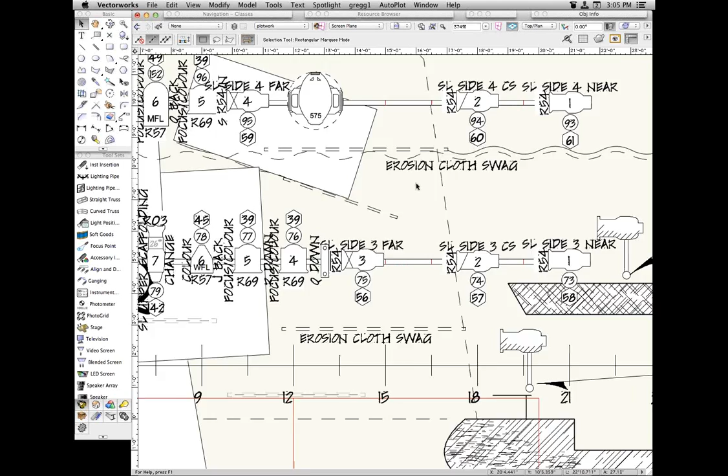All right, so then once the plot is done, everything is hunky-dory. I'm going to want to copy this up from my design layers onto my sheet layers. Very simple to do. View, create viewport, and this will then actually create a snapshot, if you will, of what I've done here, and I can choose which layer to put it on, including creating a new sheet layer or a new design layer, but in this case we're going to print, so we're going to take it to a sheet layer and go from there.

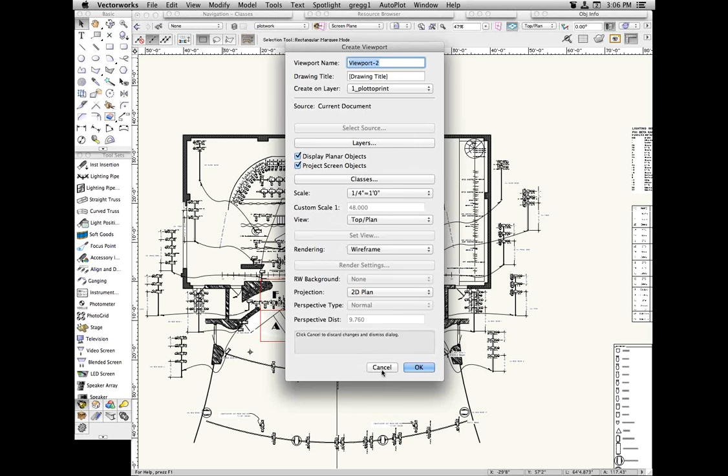We can choose what layers are visible, we can choose what classes are visible. Here's where we choose our scale. It'll default in all of these cases to what we're actually seeing on the screen. We're in our top plan view, which is our 2-dimensional view, and we tell this okay. I'm not going to at the moment because I've already done that. So this actually is a viewport, and if we zoom in here a little bit just on this, you can see that the information here is being presented in the viewport.

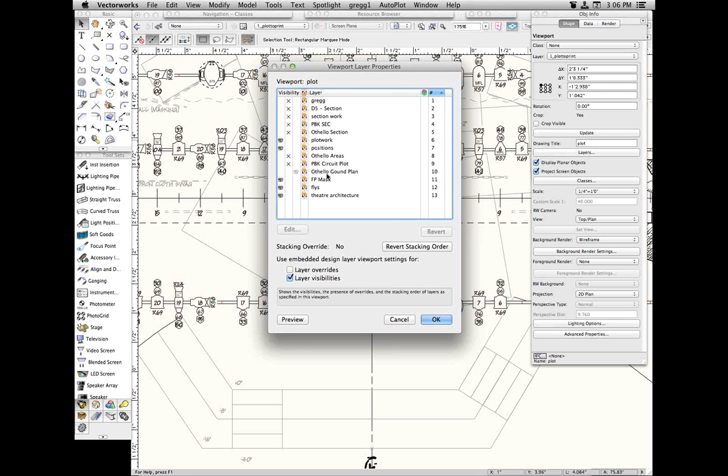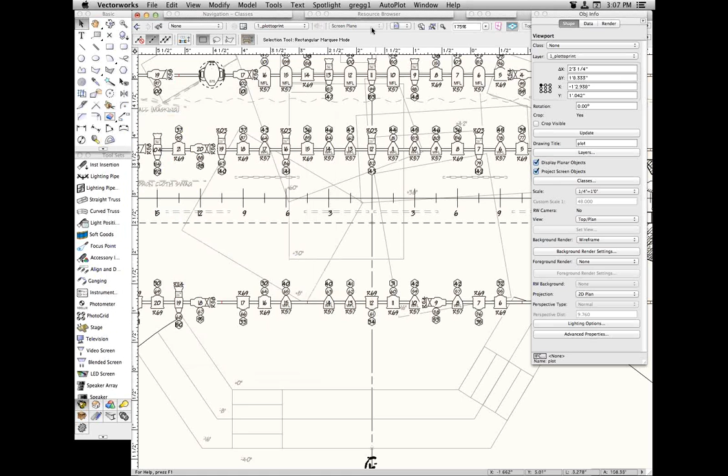I've got some layers turned off, some layers visible, layers grayed, and other layers visible here to create the look that I want. On the plot itself, the master electrician does not need to see, for example, the purpose field. That information is good when you're doing the plot, but not necessarily on the plot when the master electrician is hanging it. And the user fields are not being shown here as well. So we get to choose what information we're copying up and go from there. So at the end of the day, all of that is copied up, and then we're actually ready to either print this, or these days most of this goes out the door as a PDF.

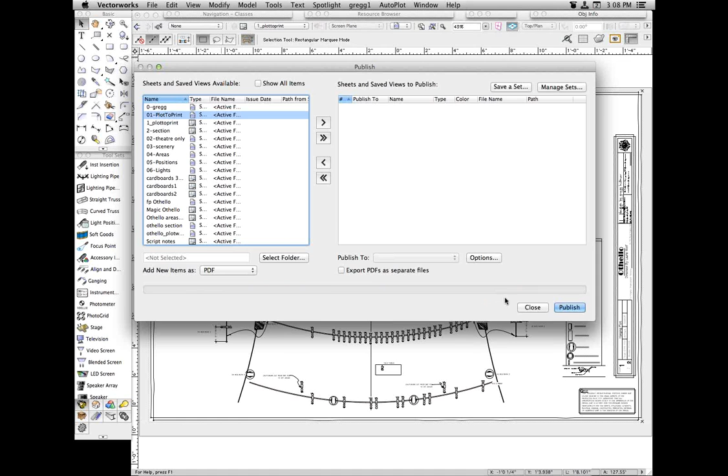I will mention again, 2014 has made some rather nice improvements in the printing. It's now actually even called Publish, so that we can choose in what format, including PDF and so forth, and how we're actually going to export all of that information. So we can print and/or publish this as a PDF and ship it off to the production manager, and we're ready to go. So that's it. Didn't get to touch on Lightwright, but the Lightwright association is still there, so information from the plot is still shared directly with Lightwright back and forth. So that is still working as well as ever.

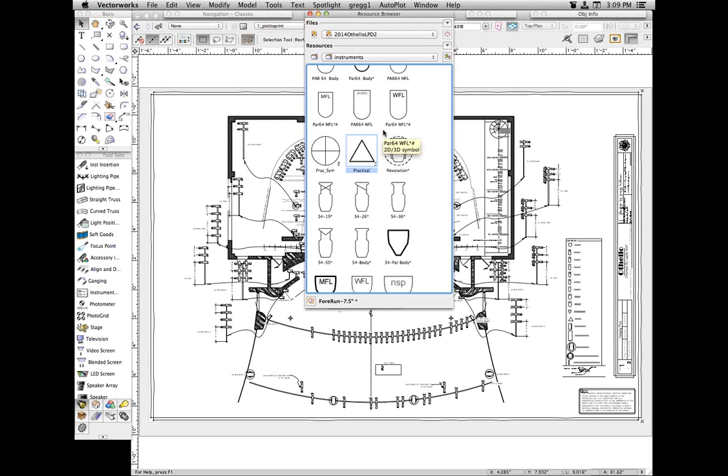Roz is curious as to how can we assign instrument data to the symbol itself. The fast answer is if you're using any of the instruments that come with the program, or from, for example, soft symbols and so forth, all that data is there. If you are building your own symbol, for example, the practicals are ones that I built myself. When you actually create the symbol, let's see if we can show this quickly. We'll do the 2D. If nothing is selected, you can then, in the object info palette, assign record formats to that symbol, and then enter information that will travel with the symbol. So that's actually a pretty easy operation.

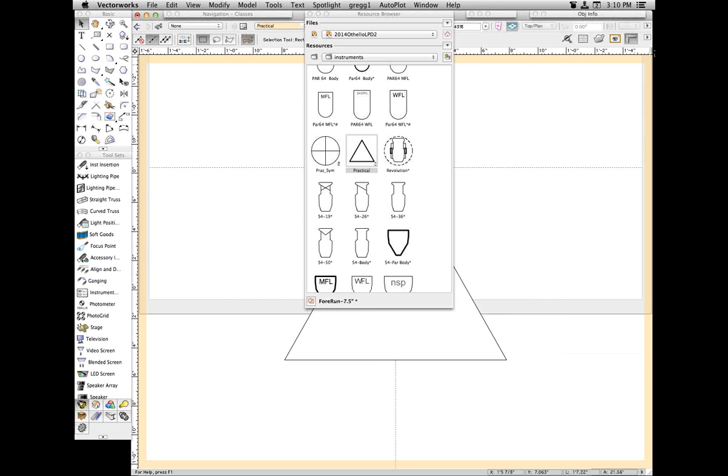So let's see. Am I using specific fonts for half-inch and quarter-inch? I'm using specific sizes, so they do change. With the quarter-inch, my memory says this is probably either a 9-point or a 10-point. This font is a font called 2x4, which I like a lot. If you look at other instances of it, it does look handwritten, and you can see where the registration lines were initially drawn. I think that's kind of cool.

One of the things I do when I draft is, yes, it is communication, but I still want to have a sense of the style. So I find that font in particular seems to keep that hand-drawn kind of look. So it's a specific font, but then I use a specific size and specify that size in the label legend, and it's different in half-inch and quarter-inch.

Review that label legend bit. I'm not sure what bit we were talking about. Yay, label legend fixes. You got that right. That was a big bugaboo for me. The idea that we can now fix label legends in the document and then create a new label legend from that was just tremendous.

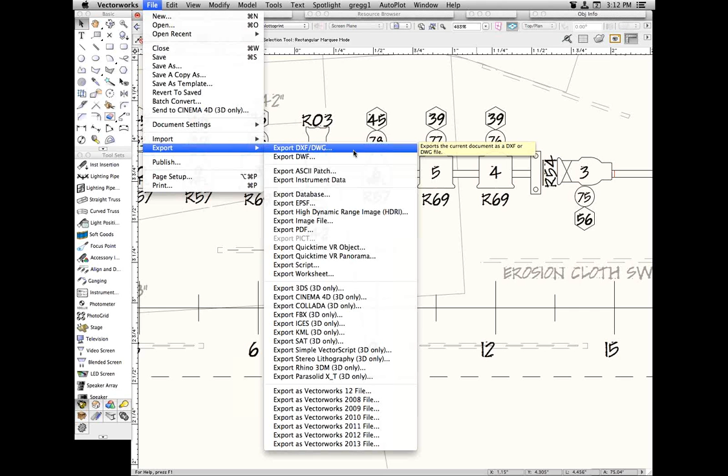So import and export with Archicad. Don't know. Here's everything that it'll import and export as. Certainly DXF, DWG. There were grand improvements in 2014 with import and export for those. I don't know what the format for Archicad is in particular, but I don't see it listed here. These are not the only import-export options. There are some others, but I don't see it off the top of my head. And likewise, import, I'm going to assume has the same list.

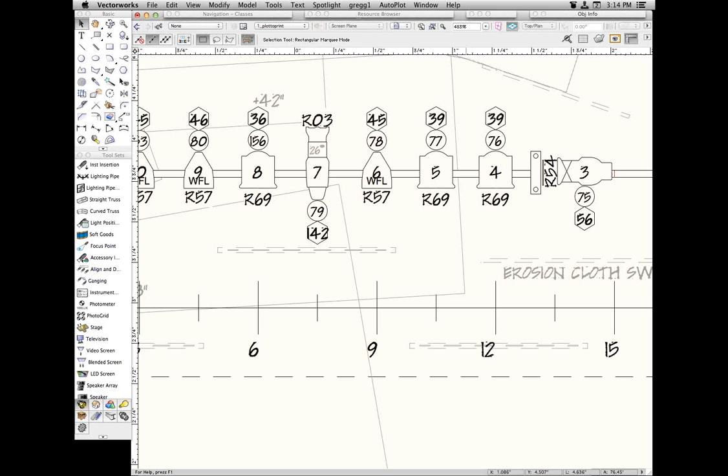There is now also an option to do a reflected position on the floor for any of those positions. That's really smart as well. So that becomes very, very useful too. Certainly with just a standard batten like we're using here, the reflected thing on the floor is exactly the same as what we see in the plot, but in many cases, actually, that can't be.

Obvious examples here, of course, are booms, where we're drawing them like these over here, as if it's laying down on the floor, but its reflected position looks more like this, and that is now completely possible without having to draw them a second time, for all intents and purposes, with the reflected floor option. So, all right, real nice improvements.